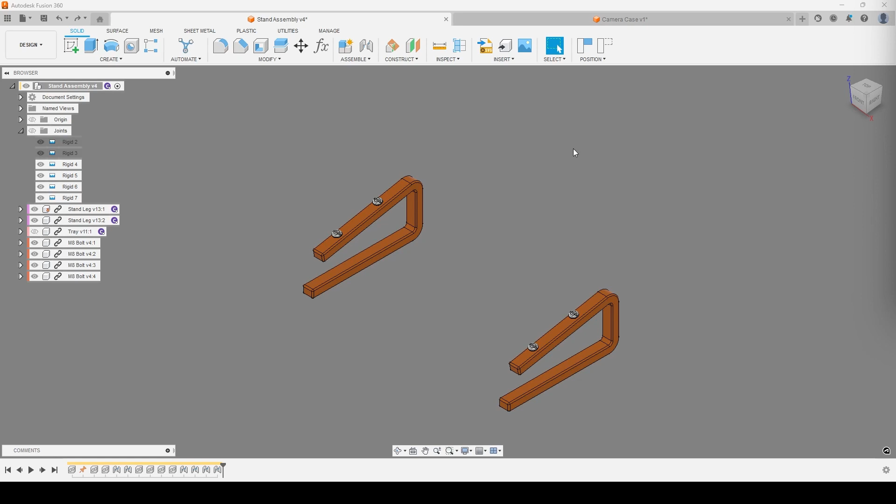Inside of Fusion 360, for this particular model, what we're wanting to do is create a tray that's going to sit on top of these two legs that I've designed inside of an assembly. We want to make sure that when we want to make any adjustments or tweaks to the sizing, we've got some fairly basic parameters that we can adjust, which will make a difference to the overall component itself. So before we get going, I just want to make some measurements inside of this assembly.

We've got the ability to come back into the assembly later on if we ever needed to, but I can just take some quick measurements of these components. So between the bolts, we've got a distance of about 80 millimeters.

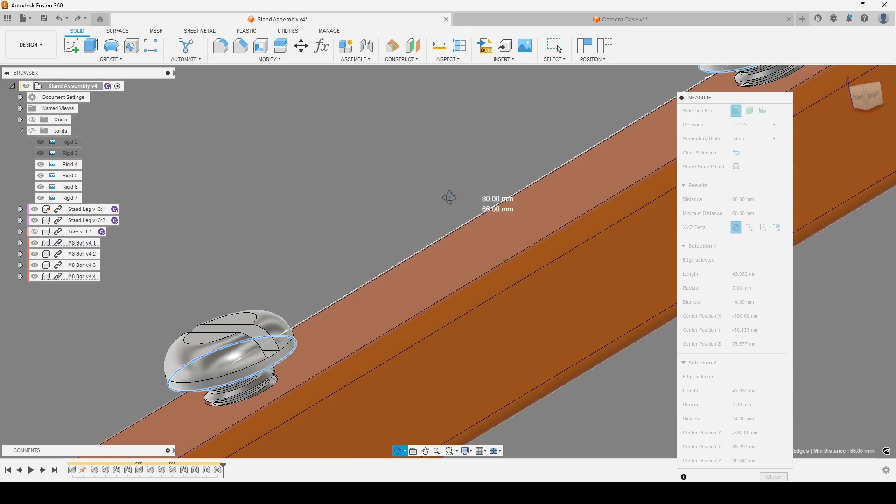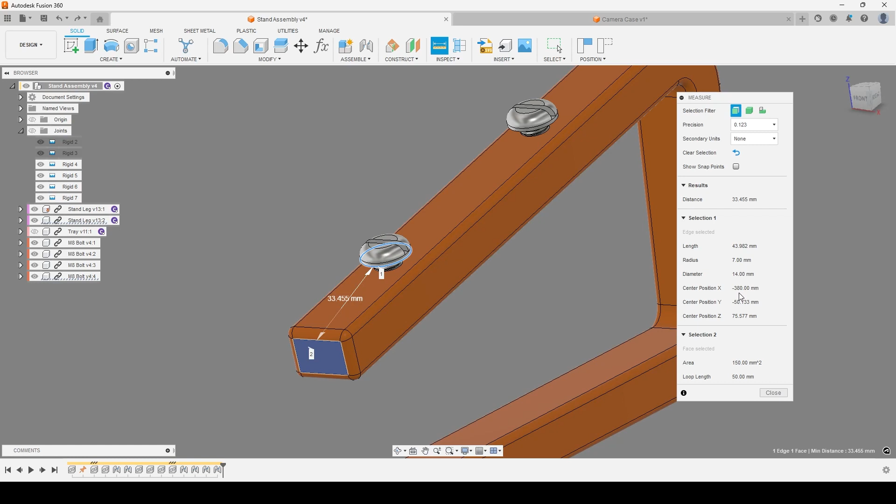And from the first bolt in the front over here to the front of the component itself, we've got a direct distance of 33.45, but we do have a length of, let me see if I can find the right one here. We don't have a proper one on there. Let me just grab it from this face to that corner over there. We've got, if I remember correctly, this should be about 35 millimeters as well. So we've got 35 from the front of the component to the first bolt, and then 80 between those.

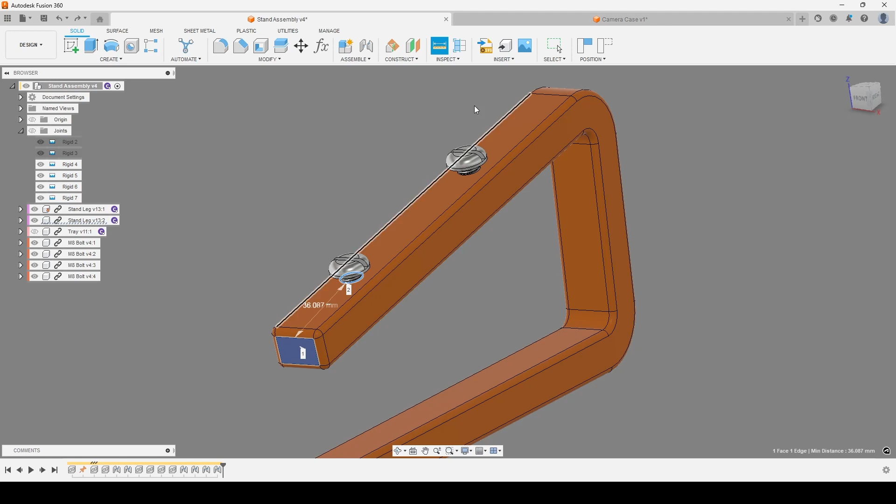So we can go in and create a new component as part of this design. I'm going to go and create this fairly simply. In this new component that I've designed over here, I'm going to go and create a 2D sketch.

I'm going to use the top or ground plane for this and create a center rectangle, which will allow me to choose the center point right at the origin, and then go for a width and a depth for this particular component.

Now, when using parametric modeling inside of Fusion 360, we've got the ability to name our parameters as we start to place these in. So you can see at the moment, the first dimension it's asking me for input on is the width, and that's currently at about 300. I want to give it a value of about 400, but I also at the same time want to give it a name. When we name our parameters, we tell Fusion that these are important parameters and we want to make use of these particular parameters at a later point.

So if I had to go in and say that this is going to be the width, if I could spell width, and say that this is going to be equal to 420.

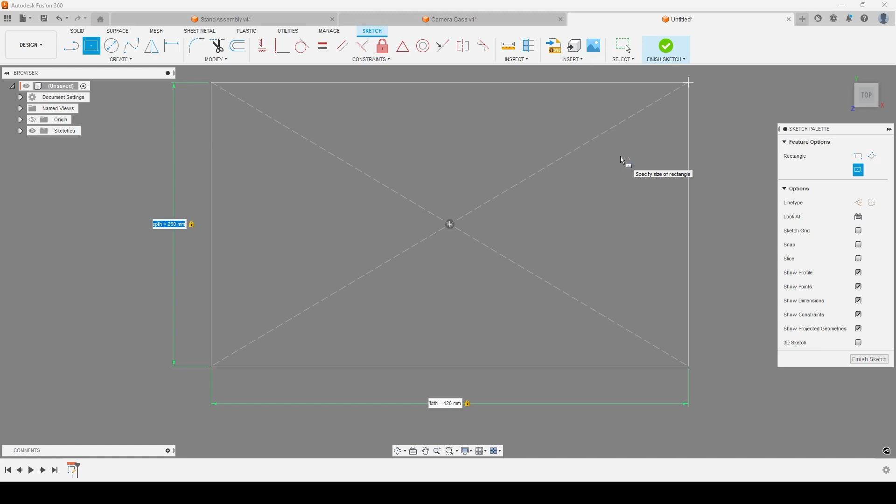I can then hit tab to go and type in the depth that I want. I'm going to go and say this is the depth, and say that this is going to be equal to 250 for now. We can adjust this later on. As soon as I'm happy with those two, if I wanted to change either of them, I can just hit tab and switch between the two of them. But if I'm happy with that, I can hit enter, and it'll then go and create the sketch for me.

As soon as I'm happy with that sketch, I can hit finish sketch, rotate my model around a little bit because I like to be in an isometric view. And then I can go and extrude this by a certain amount.

Now the extrusion, I can also give it a name. I can tell Fusion that I want the thickness, or in this case, maybe I want to say THK. This can be any name that you want within certain reasons. There are some system names that you wouldn't be able to use. I think dia is one of them.

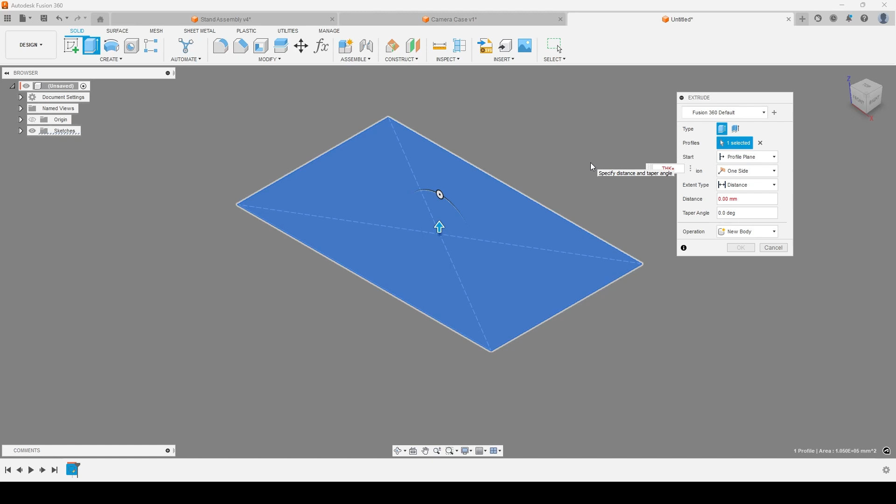So there are a few that you wouldn't be able to use, but we can get around these, and there will need to be a single word. They're not allowed to have any spaces in them, so you can either use camel casing or underscores to separate words. But I'm going to call this THK, and I'm going to say that the thickness is going to be, let's go for 2.5 millimeters. Hit enter, and we've got that set there.

So that's all good and well. This is normal standard procedure really as part of this process, other than giving the names to our parameters. But where this does come in really handy is if we had to go into our modify panel.

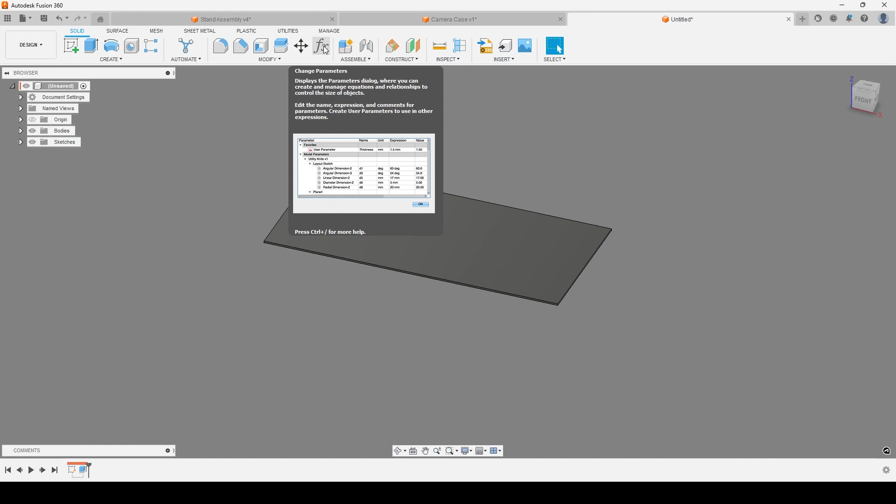Right in the drop down we have change parameters. I've bookmarked mine, or clipped it to the toolbar, so you're hitting the 3 dots over there. I can go and pin this to the toolbar, and so my change parameters button is right at the top in the toolbar itself for easier access.

If I go and grab that, what you'll notice is all of the parameters that I have named, it has added a little star next to them and favorited them for me. So I've got a width, depth, and thickness.

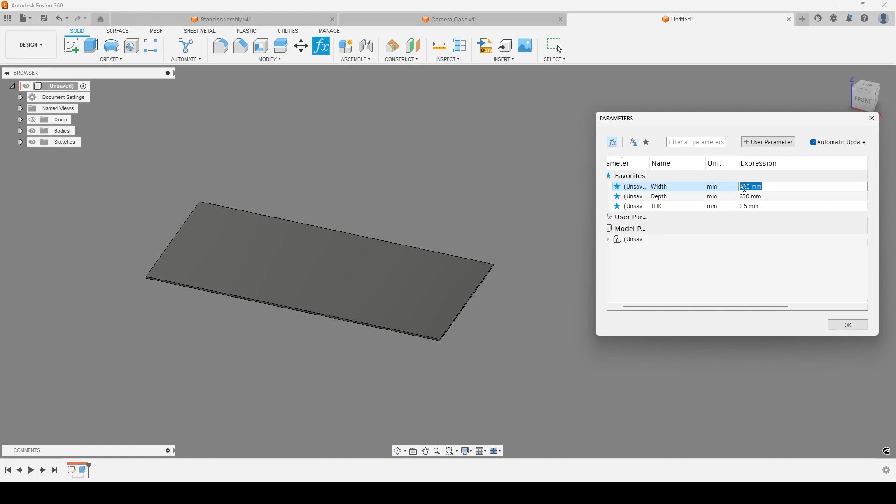What this allows me to do is go and change those values at any point without needing to go into the sketch itself. So if I wanted to, I can go in and change the value of the width. Maybe I want to drop this to 350. I can hit enter and you can see the width of the panel changes. If I want to change the depth, I can go for 220, hit enter, and the depth changes, and same for the thickness.

What Fusion have recently added is the ability to defer automatic updates. So if you were working with some more complicated geometry, in this case we've got a very simple model at the moment, but you can imagine if you were to make some big changes to certain values, they might start to break others without the other values being updated.

We can defer updates temporarily, and I can go in and say, okay, this I want to go back to 400, this I want to go back to 250, and this I want to go back to 2.5. And as soon as I hit apply, it's going to go and apply these changes for me automatically and re-enable automatic updates. So it is just a temporary toggle that's available to me there.

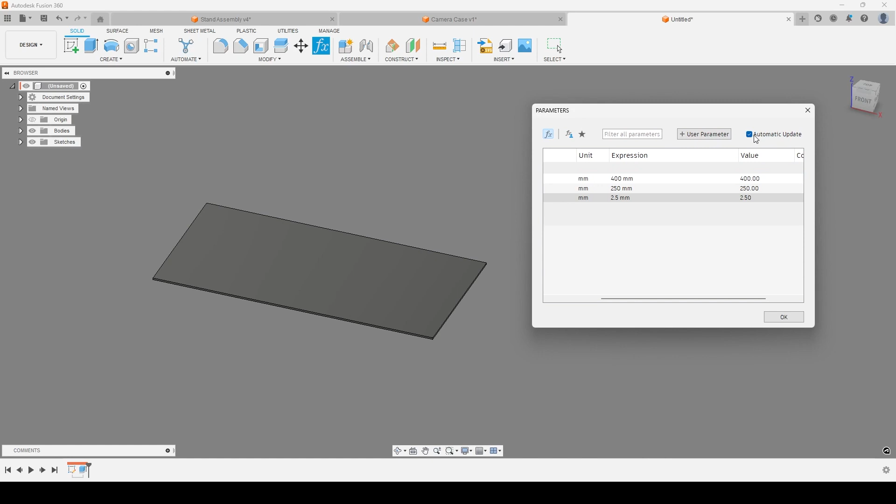So really great functionality we've got while designing inside of this. And you can imagine the usage for this is when you've got a lot of components that might be very similar in shape and size, but you're just running various configurations of your particular component, or you are unsure of what those exact values are going to be initially and want the flexibility of making those adjustments inside of the design.

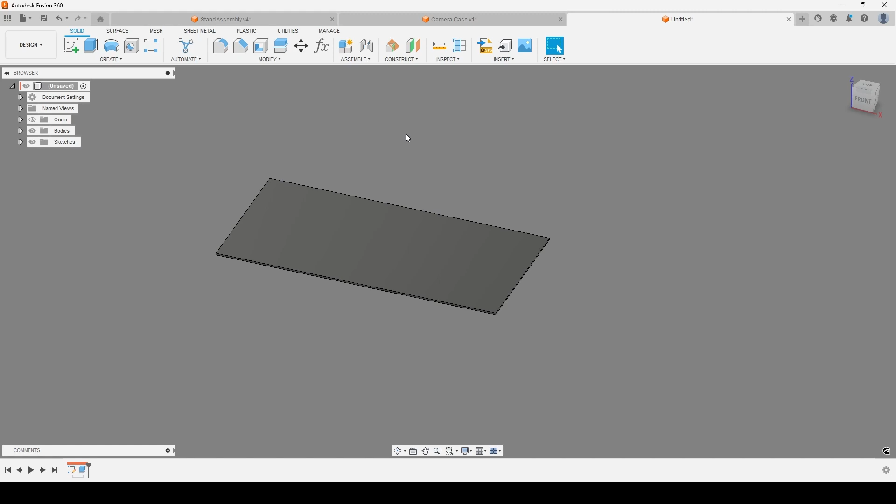What we also got the ability to do inside of this is then use those parameters and start to make some fairly complicated equations as part of this as well. So I'm going to go in and create a new sketch just on the top face over here. And I'm going to place down a single point for the location of a hole because I want to make my panel a little lighter so that it's not going to be too heavy for our stand.

What I'm going to do is I'm going to go in and say that I want the positioning of this hole or this point over here to be 30 millimeters from the front and an equal distance from the side. Now I could go in and type that value in once more, but I can also go in and say I want to go and grab the value of the other dimension. And you can see it's automatically named that D5.

If I had been better about this, I can actually go in and delete those two dimensions, add the dimension in once more, and give this a value. And we can say this is the hole position, or hole pos should be fine, and that's equal to 30. If I then do the same from the side to the point and place it down over there, I can say be the same, hole position 30. You can see how it's referencing that hole position as its value.

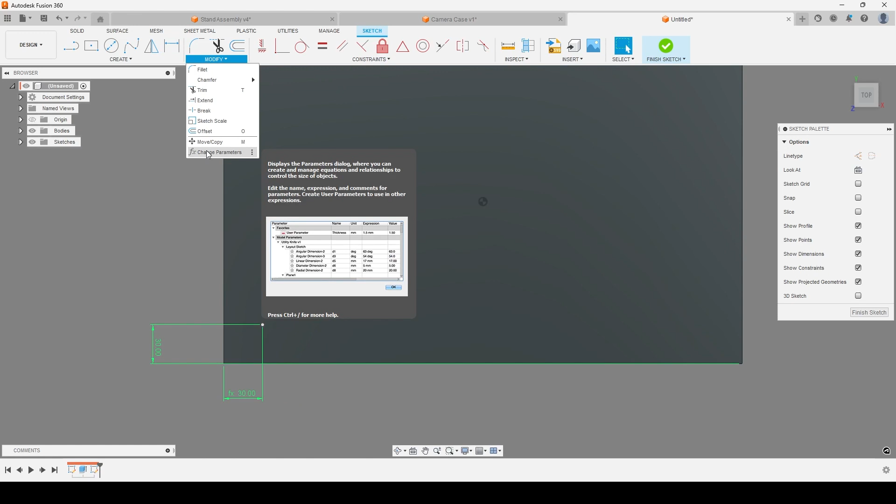Again, if I go into my modify dropdown and change parameters, which is also available inside of the sketch environment, you can see because I've given that a name, it's automatically favorited that for me. And again, I could go and change those values as and where I saw fit. If I hit finish sketch on there now, I'm happy with the positioning of that.

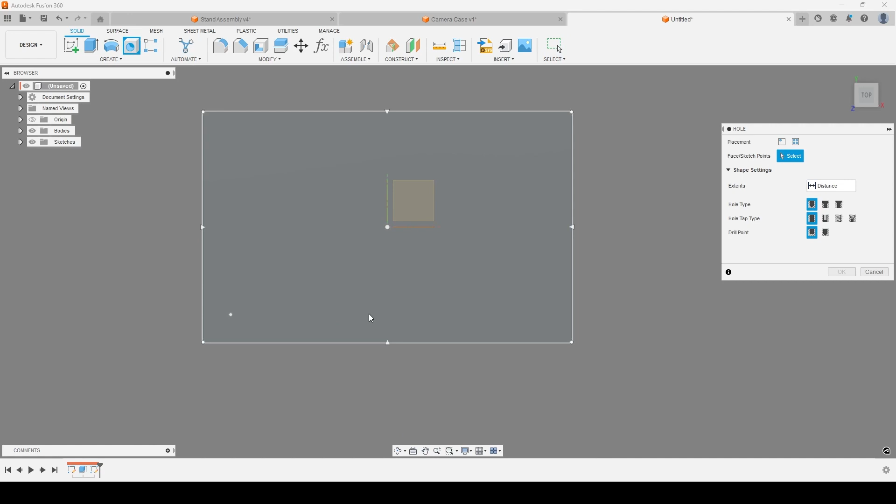I now want to go and place a hole in. So I'm going to use the sketch point to drive the positioning of the hole. So I'm going to use my hole tool, say that I want to use from a sketch, and I'm going to go and grab that hole over there. I can see I've got my hole created there. I've got an 8 mm diameter. Maybe I want to give this a name, so I'm going to say this is hole dia, and that's going to be equal to 8.

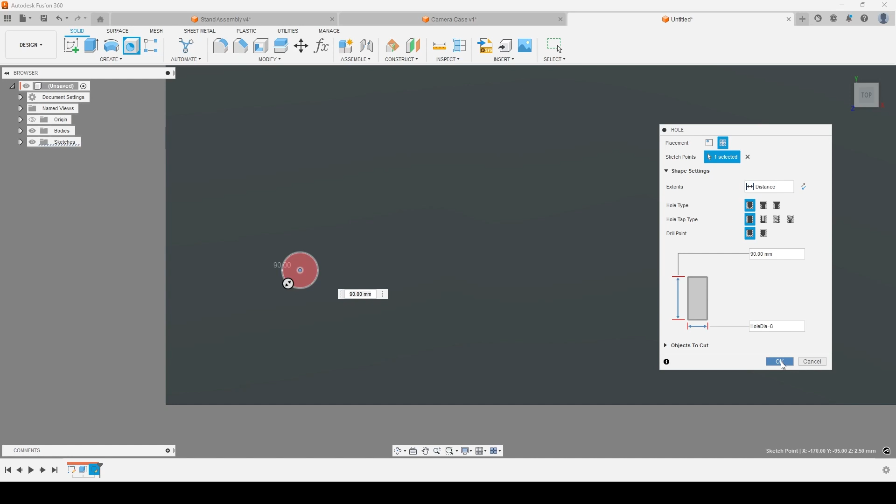So again, naming these dimensions as we put them in will allow us to then make use of them a little later on. So hit OK on there, and my hole diameter has been named, and I've got a single instance of that located there.

Now, perhaps during this process, I want to go and create a pattern of said hole. So I want to go into my create panel, grab a pattern of that and say, you know what, I want to make a pattern of the feature. The feature is going to be the hole that I created, which I'm just going to grab from my timeline down at the bottom. And then I'm going to tell it that the axes that I want to go in are going to be the X and Y axes.

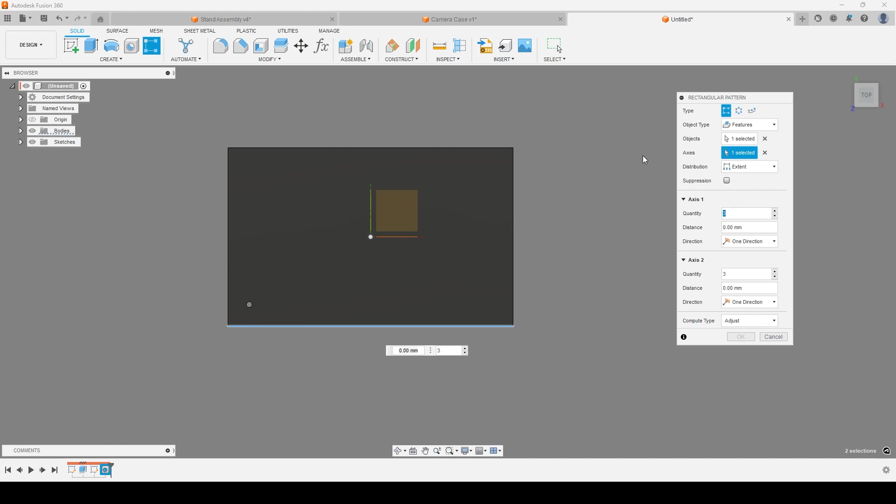I'm going to have a number over here. Maybe I want to say the quantity is going to be, let's just see exactly which one it's using at this point. We've got one object selected. Why am I not seeing these there? Because the distance hasn't been set. Fine. So we've got a rough idea of what that's going to look like over there. And then I can say the quantity is going to be, double check that quickly. I think it's the X first in this particular case. Yep, it is. Cool. So I'm going to say the X QTY is going to be equal to 4.

And the Y QTY, or whichever name makes a bit more sense for you if you want the depth, so you can go the D QTY and W QTY, or whatever kind of makes sense for you. I'm going to go and set that to 3 in this case. Then because we are using an extent rather than a spacing, we want to make sure that the distance of the overall pattern is going to start and end at more or less the same position in relation to the edges of our component.

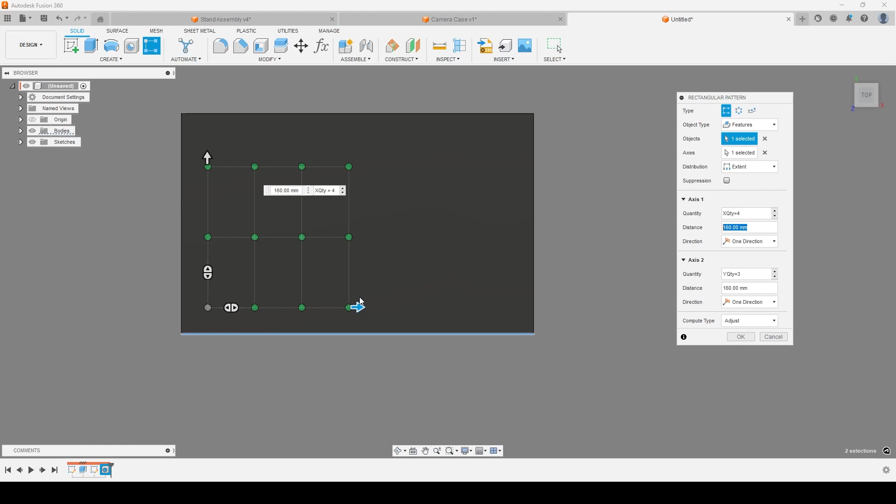And to do that, we can actually start to make use of the dimensions that we've already added into Fusion. So we already know that the distance from left to right is going to be the width of the component. So we're going to say that the distance is going to be equal to the width. But we don't obviously want it to be the overall width because that's going to extend over. So we want to subtract from the width. So we can put a minus sign in there. We want to minus twice the size of the hole offset.

So I can go in width and in brackets, I'm going to say hole pos, there we go, times, using an asterisk, 2, and close the brackets. So we can use some fairly complex equations as part of this process, which is really going to allow us to hone in the positioning of our parts. And you can see now it's going to have the same distance from the one side to the other because the distance from the left is going to be the hole position. Then we've got the width minus twice the hole position.

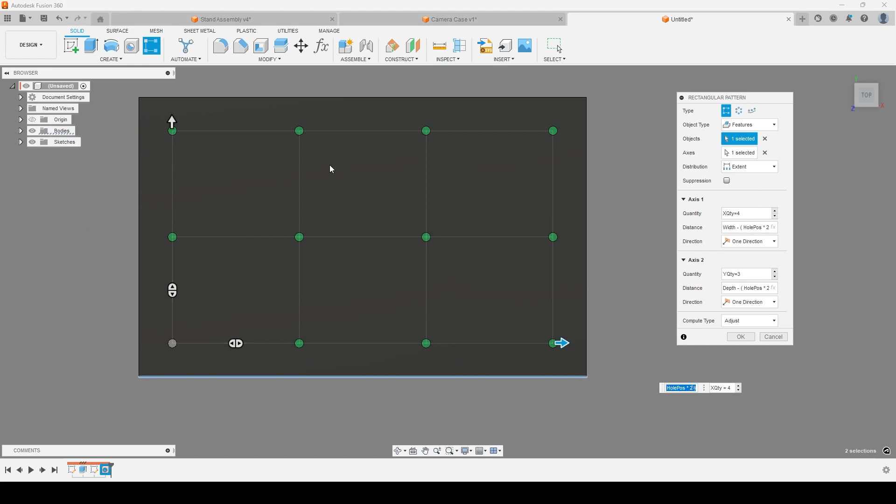And we can essentially do the same process for the other direction. So I'm just going to copy this to make it that much easier. And for distance 2, I'm going to say width value minus hole position, but I'm actually going to change this to the depth instead. And it's going to pick up the depth. And we can see that the positioning is exactly how we want it. So I'll hit OK on there now and finish that off. At the moment, it hasn't quite filled it in exactly the way we want it, but for now, that looks fairly okay.

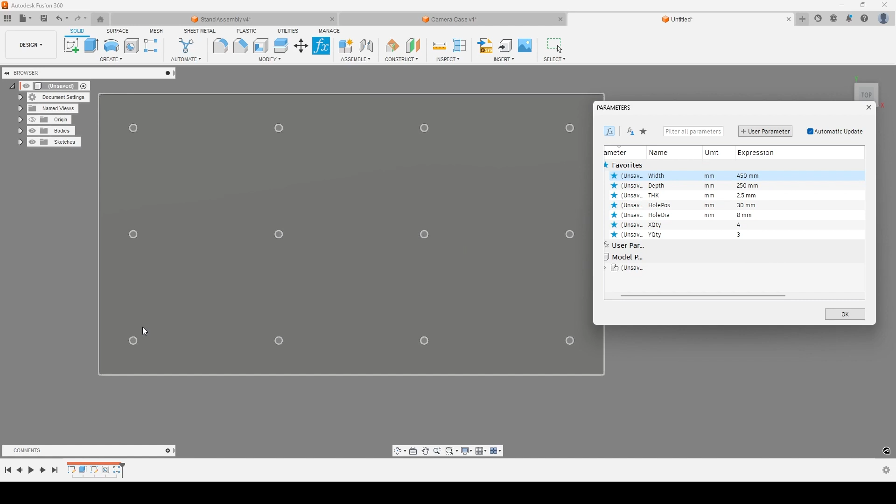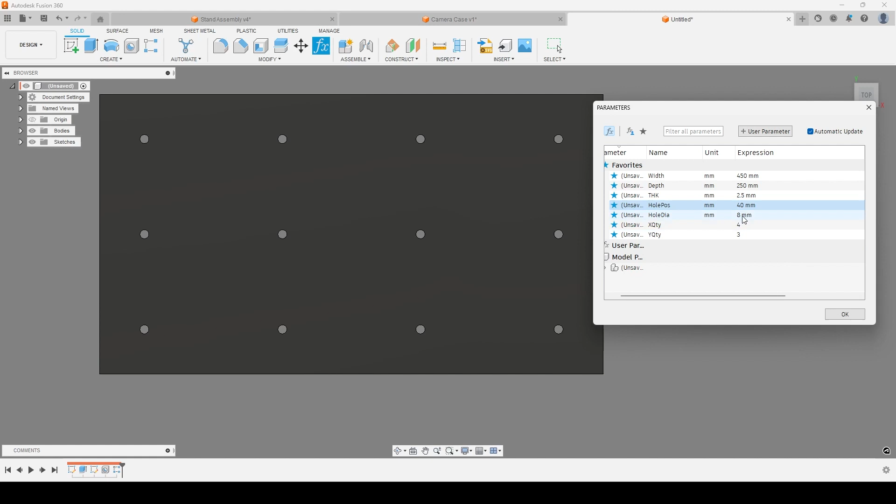I can go into my change parameters once more though and start to fine tune that as and where I need to. So I know my width is 400. If I bump this up to 450, you can see the positioning of the holes in relation to the edges is still true because we set that value for ourselves. If I adjust that hole position value to 40, maybe I want slightly larger holes and don't want them as close to the edge, that will then drive the hole positioning from the outside of the component in all directions because we've used that as part of the equation.

We've got the ability at this point as well to change the hole diameter to 10 millimeters or more or less. And we've got the ability to change the number of holes in the X direction and the Y direction. Again, we can rename those if we wanted to. So we've got 4 along the width. So I can maybe say, actually, I want this W quantity and this to be D quantity. I can go and change that now.

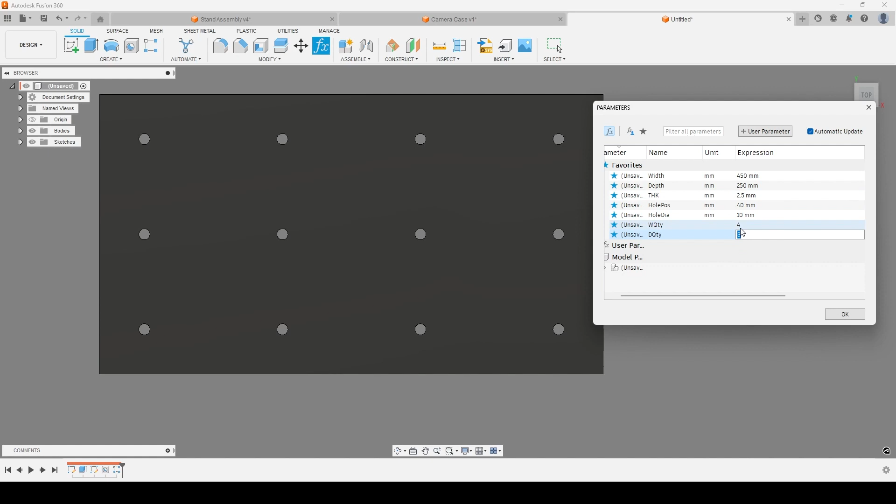So if I wanted to double that, I can go for 6 holes in the depth and 4 holes in the width, and maybe bump that up as well to 8 and 6. And you can see how just by going in and changing a few values at this point, we've got the ability to really hone in again on the design of our component. If we understand the concept of it and we've got a design intent, we've got the ability of enforcing that then with the parameters that we come in and place.

Now, as you see, we've got the ability to reference others. So if we wanted a certain width to depth ratio, we could adjust that as well. So we could say that the width is always going to drive the depth value as well. So the depth is always going to be the width times 0.8, or maybe let's go 0.6. So whatever value we give to the width, it's going to then adjust the depth as well. So if I had to change the width value to 600, the depth is also going to be changing at that point.

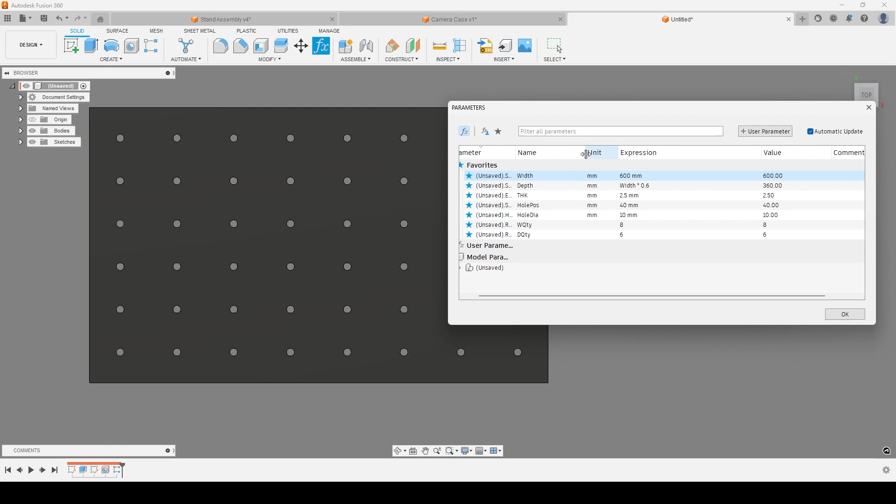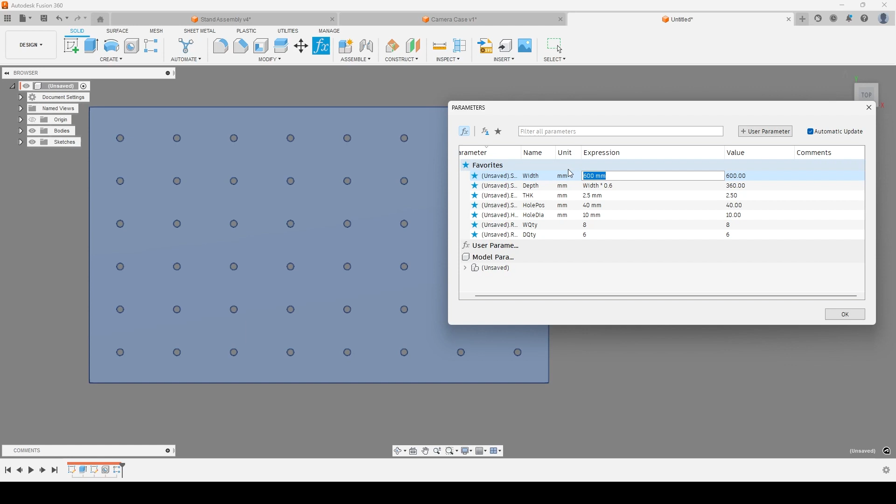So if I expand this out a bit, you can see how this works. We've got our parameter value, we've got the name of the parameter itself, we've got the unit of measurement that it's using, and then we've got an expression column. And once it's made sense of the expression that we've created, it gives us an overall value at the end. So as I'm adjusting the one value, if I'm referencing any other parameter, say for example the width that is being referenced by depth, it will always change based on that as well.

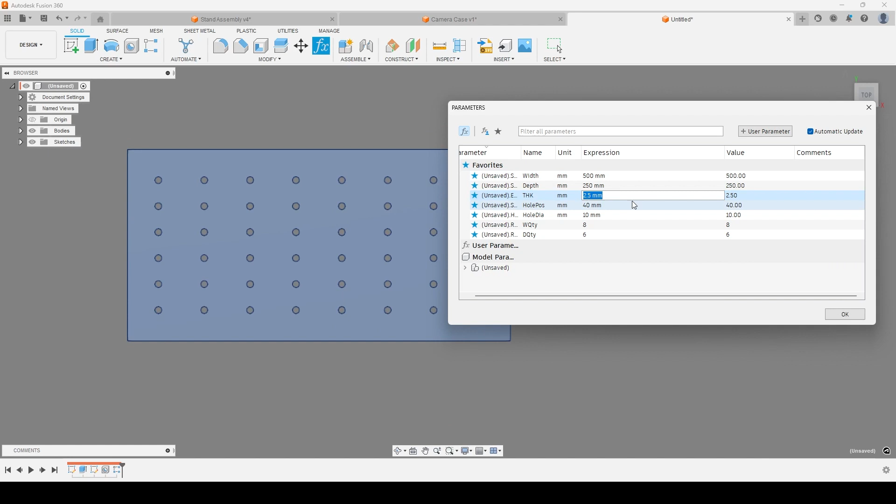So it's a really great way of making sure that, again, we're keeping that design intent true as we go through. If we wanted a different value for thickness, we can come in and set that here. Hole position, hole diameter, number of holes in the width and depth. Rather than having to go in and try and readjust every single individual parameter every single time, we've got the ability to very quickly go through and adjust these here.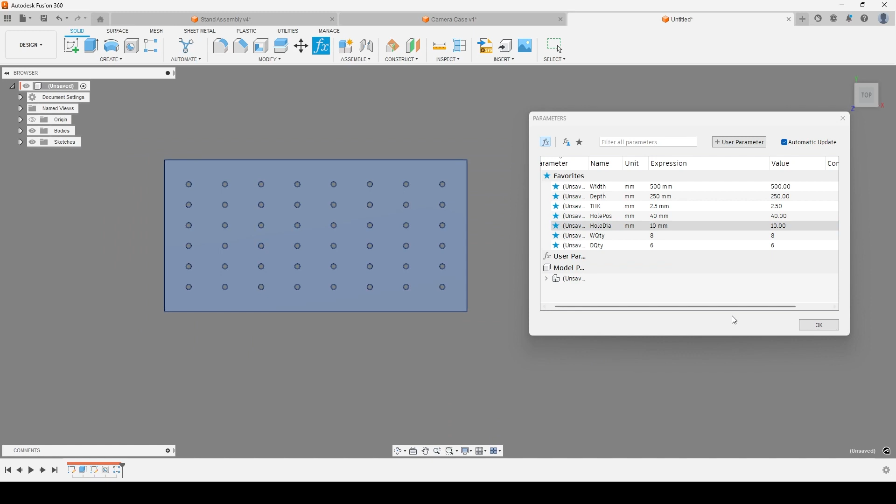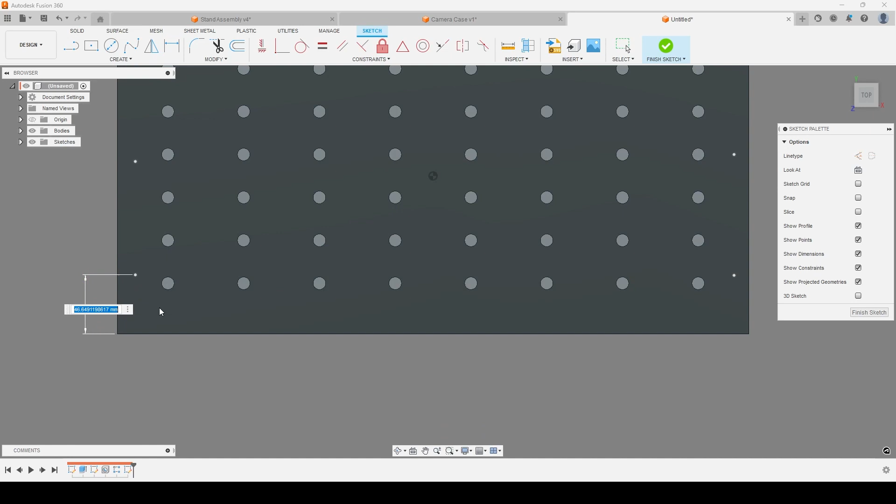Then lastly, we just want to go in and add those 4 holes. Again, going to use a sketch for this one, just for the positioning of our components. And if I remember those values, I can always double check them, but I've got a point there, there, another one there, and there. And I'm going to add a dimension of, I think it was 35 millimeters from the front, and 80 mil from the first point to the second point. And then I want the holes on the opposite side to be horizontally in line with those two.

So again, using our parameters, I can go in and change this value to 40, and it's going to drive the other values as well. If I change the 80 mil to 75, you can see the hole position for the 2 top ones changes as well. Fairly sure it was 80, and let's just make sure these are all vertically in line with each other as well. So I'm going to use my constraints to make sure they stay in the correct positioning.

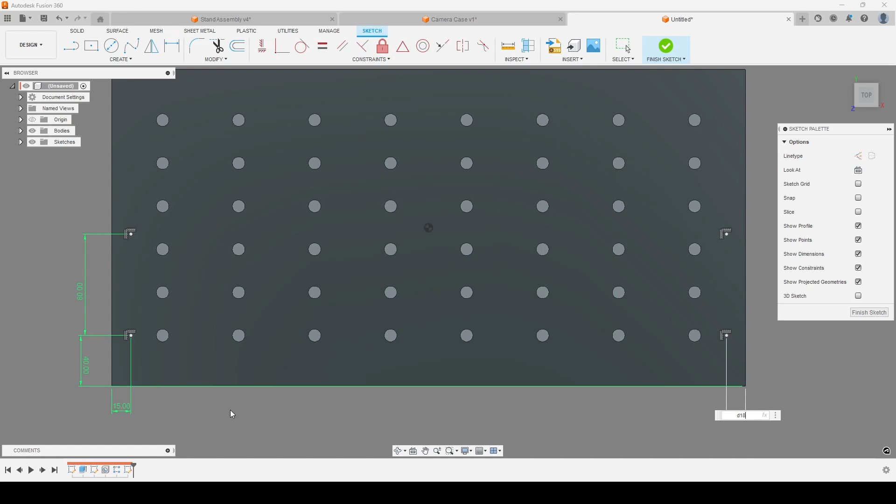And then the last one is just a dimension from the side, which I didn't measure. I'm not going to name this one for now. I'm going to say this is going to be 15 millimeters just as a guide. And I want to make sure that these are exactly the same distance as that from the side. Finish sketch on this quickly. Create the holes that might be required as part of this process. So 1, 2, 3, and 4. And I want a diameter of 8 mil on these holes.

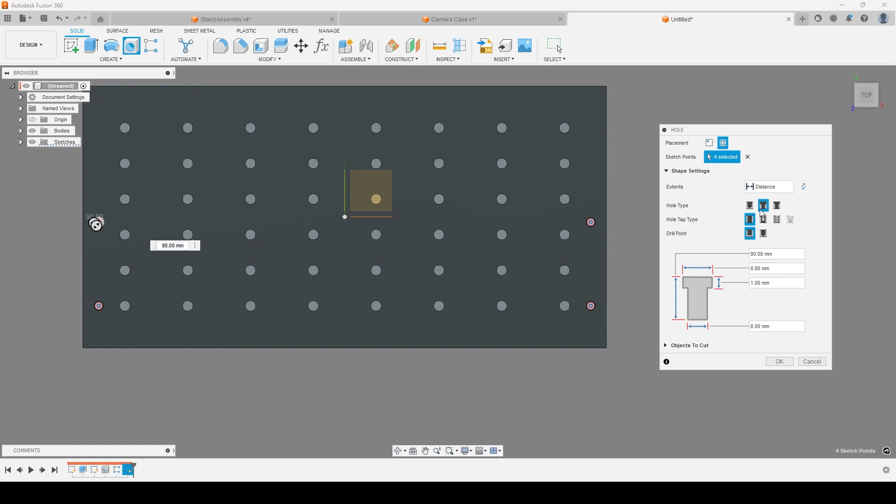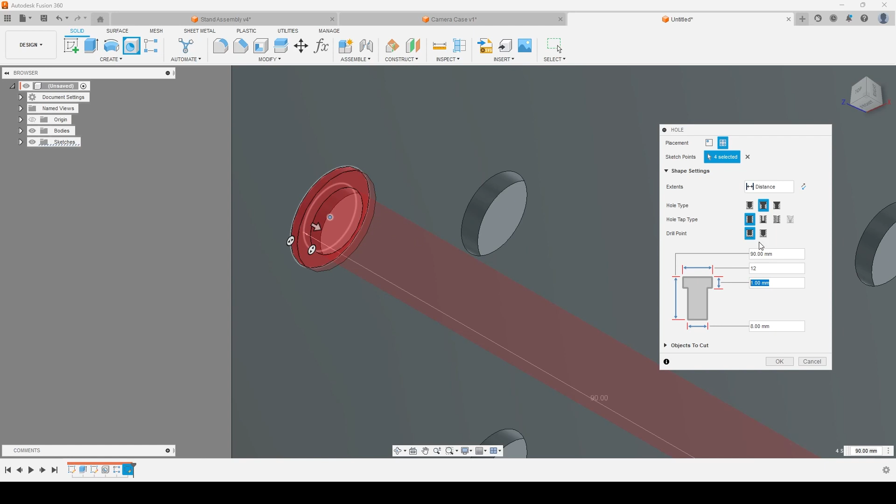And potentially I want to make them a little bit more complex. So I'm going to go and grab a counterbore for these. Let's go a little closer to the side over here. Maybe adjust the counterbore diameter. Bump this up to maybe a 12. The depth at 1 mil should be okay, and the other value should be okay as well. Rather than a through all or a distance, let's go and say we want a 'to' value, so it's always going to go to the back of our component as part of this process.

Hit OK on that, and we've now got the counterbore holes created in a similar manner to how we had the other holes created. Once you're happy with this, we can save this file, and we're going to call this the laptop tray.

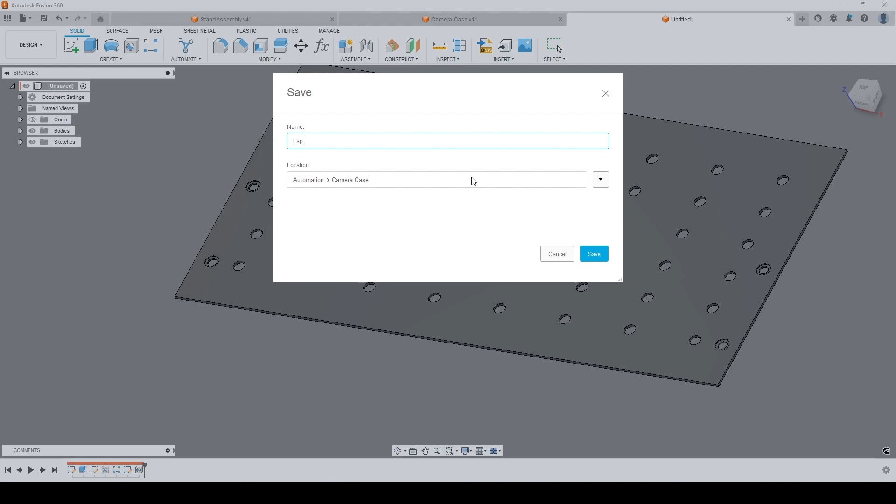Don't want to save it to camera case because that's the wrong location. So let's go into our Fusion overview and save it into that location. Great. So now that we've got our laptop tray created, we can go into our assembly and we can drop this item straight into our assembly.

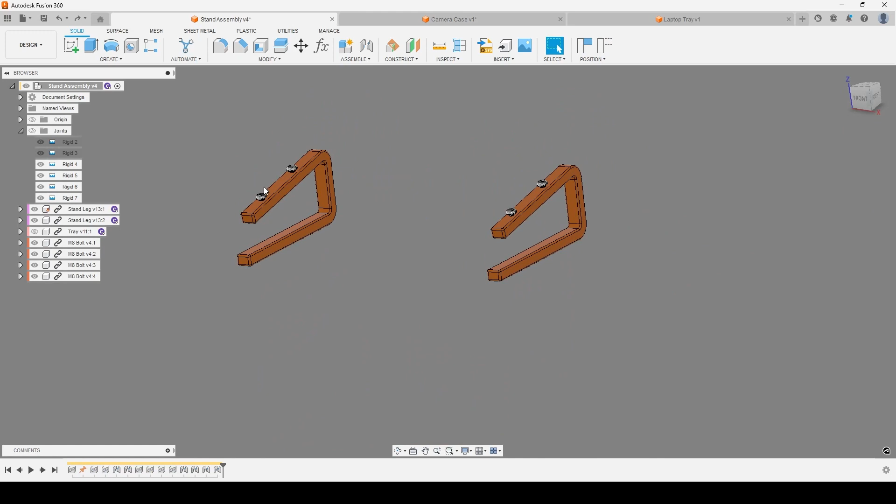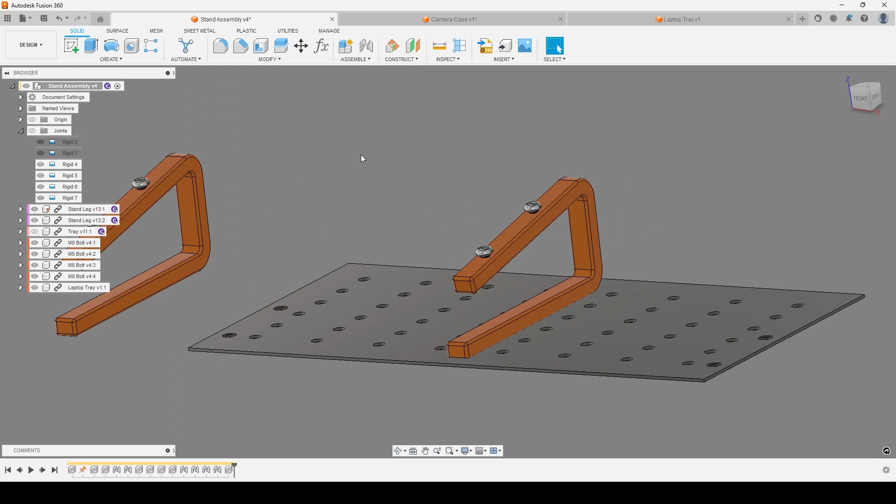So I'm going to go into my data panel on the side here, go into the location that I'm wanting, which would be the Fusion overview, and we can see we've got our laptop tray available to us here. I'm just going to drag and drop it into my assembly. And okay that, I'm not going to worry about the positioning just yet. And I'll close my data panel just so I've got the visibility once more for this.

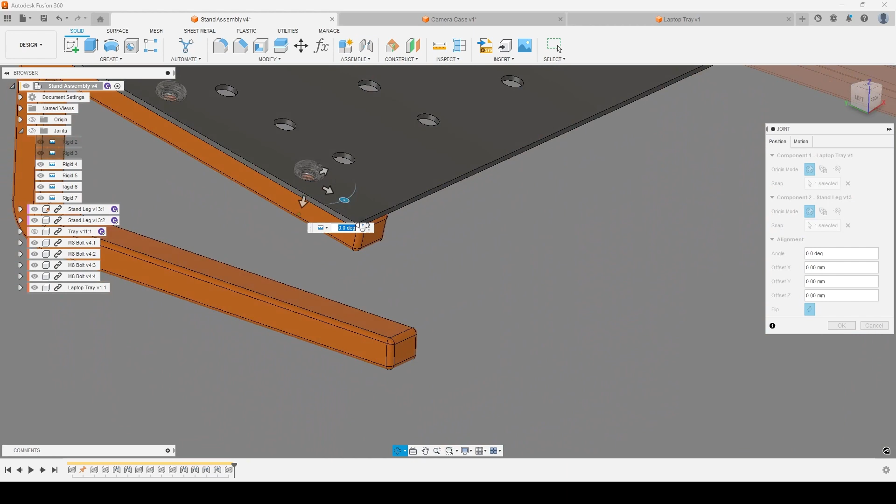From here, we want to go and add some joints in very quickly just to make sure that our components are aligned correctly. So I'm going to go and grab the hole over here and make sure that it's aligned to the hole on this particular component. And as soon as that's there, I can establish more or less if that is in the correct positioning, and my calculations seem to be okay so far. So we're all good on that. I can hit OK on that and place that in.

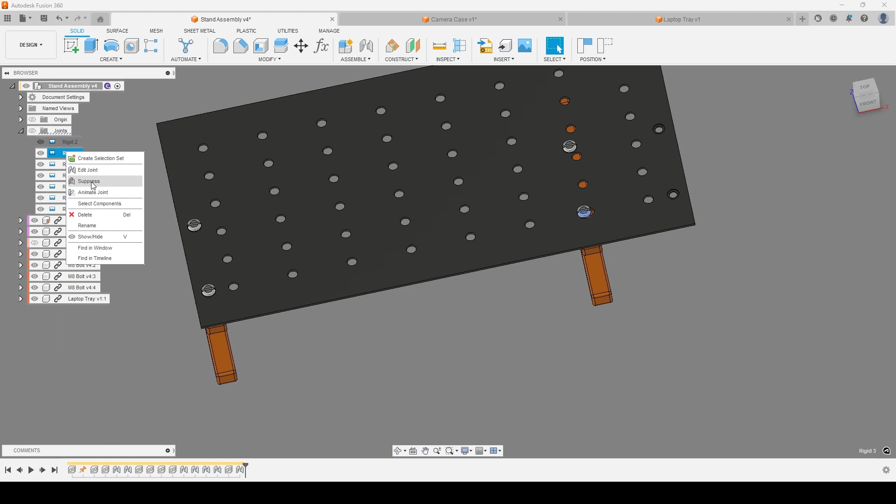Now we've got these other components over here which can't move around, which is interesting. I'm fairly sure they should be moving around. I haven't suppressed these. Let's suppress these very quickly, which should mean that they're not going to be causing anything. There we go. So we've got the positioning fine in relation to the tray and the stand. I want to go and do the same on the opposite side. So again, the bottom of that hole to the top of this hole over here.

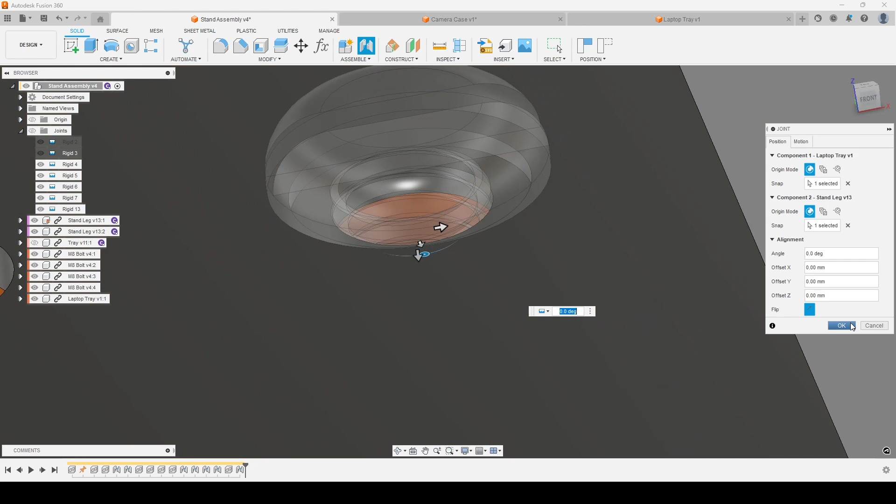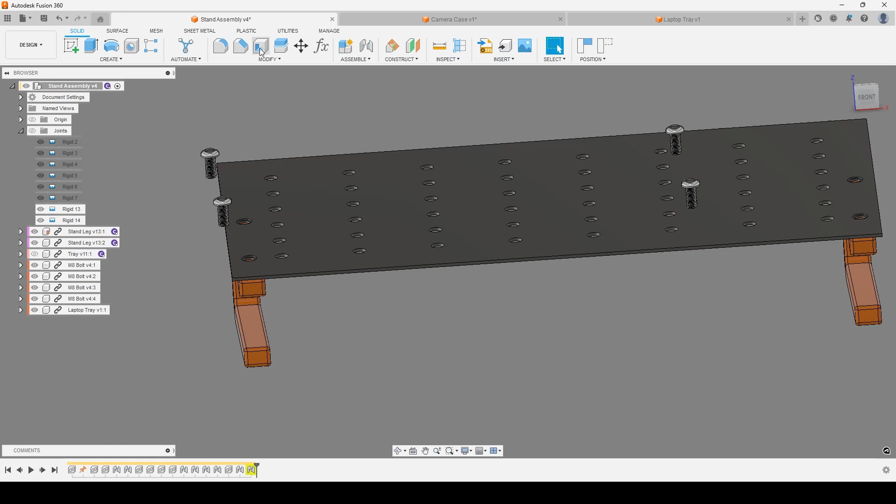And okay that. And now we've got our two items. Yep, the legs are attached. The bolts are just not attached at the moment. They can float around as and where they are. The reasoning for that is because they're associated to something else. So let me just go and remove and suppress those, so they should be able to move freely wherever they want. And very quickly, just go in and add some joints between the bolts and the holes that we've created over here.

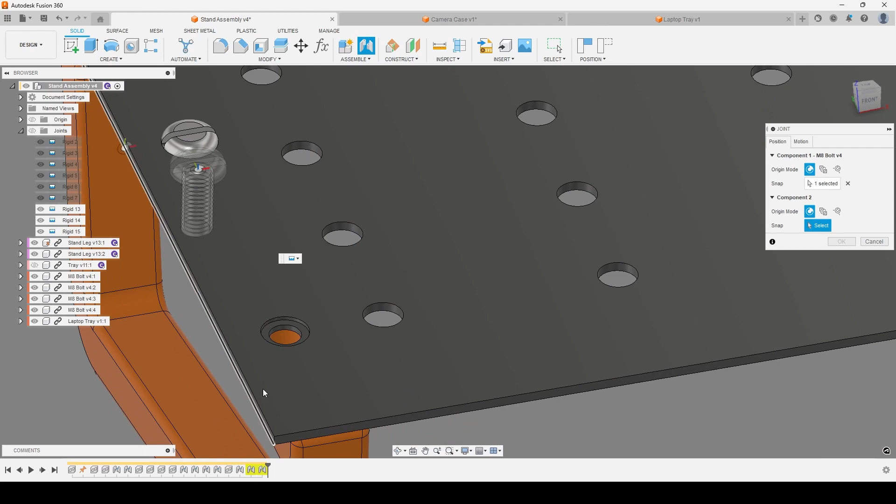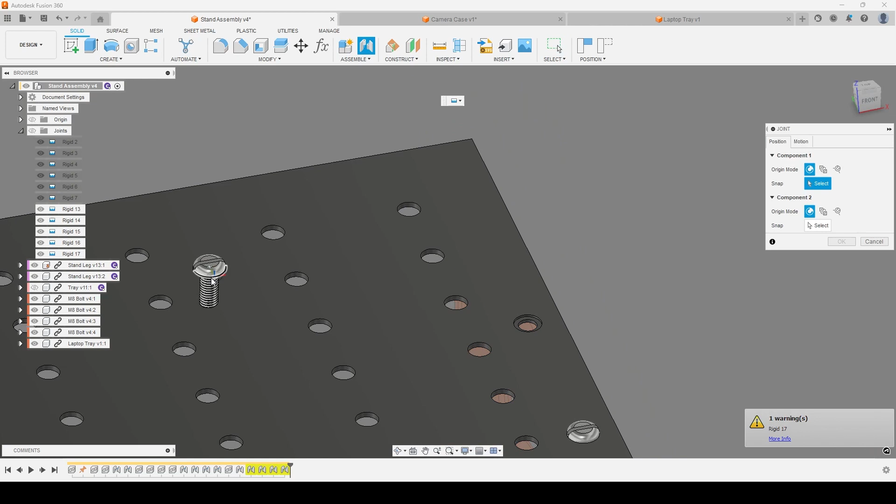Might need to adjust those counterbores. They seem a little bit too small for the bolts that I've created. So that could be something I go and adjust. We've got the parameters for all of those now, although I don't think I did add it in for the bolts, but we'll ignore that for now. And last one very quickly, somewhere over here, we've got our hole and place it against there. So now we've got a fully assembled component minus the bolt and the nut on the other end, but we'll ignore that for now.

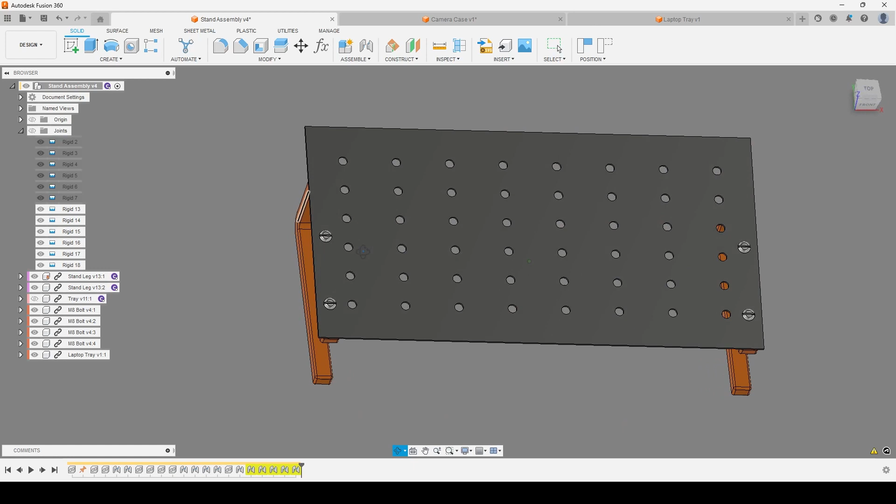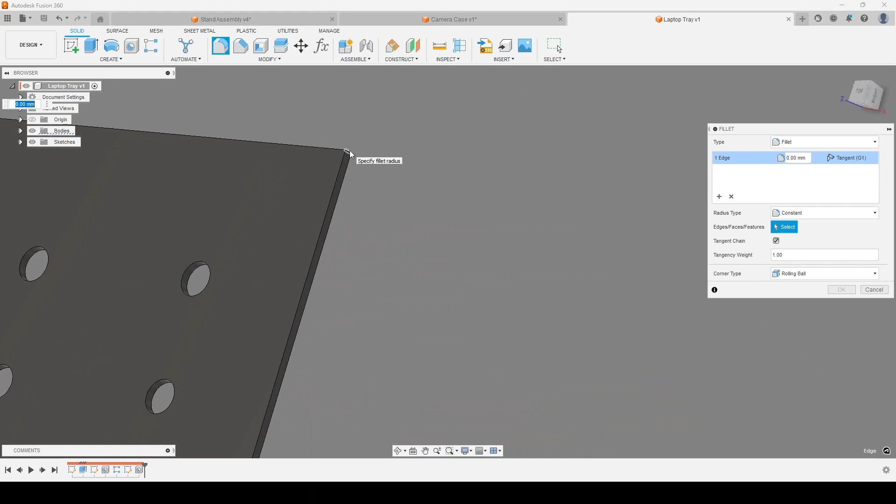Now we might notice in this one that the tray is potentially a little bit too long, so we might want to make that a little shorter. Might also see that perhaps it needs a bit of a rounded edge over there, so we might want to go in and make the adjustment to that. So I'll go into the laptop tray very quickly once more, go and add some fillets to the edges, go and grab all 4 edges. Last one. And adjust the sizing of it.

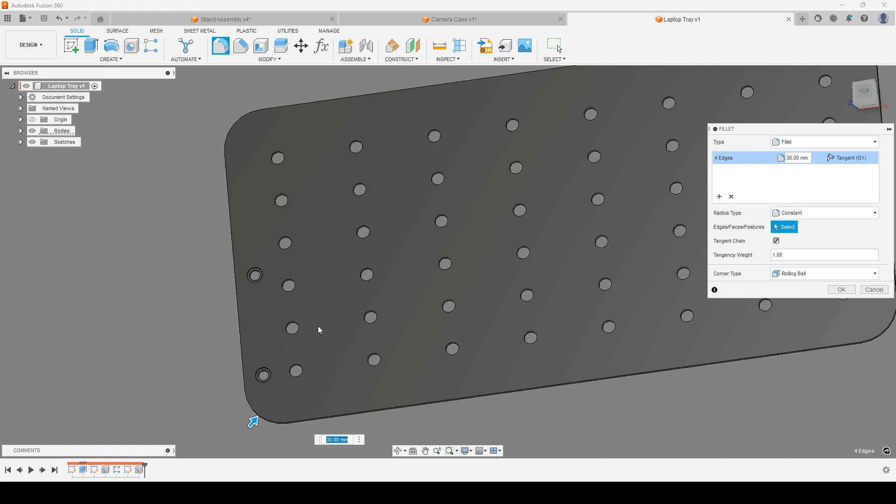We had the 30mm on that item over there, so maybe about a 30mm should be okay on here as well, although we upped it to 40. But I'll go for a 30mm fillet on there and hit OK. Again, if we wanted to, we could name it at that point, but we can also go into our parameters. Into the list over here, we've got the model parameters that are available to us.

And it'll list every single feature that exists inside of our component, including the hole 2 over here. And you can see the hole 2, we've got a hole depth, hole diameter, and then we've got our counterbore depth and counterbore diameter. I can go and call this CB dia as well if I wanted, and favorite it at the same time. And that'll now appear at the top of my list.

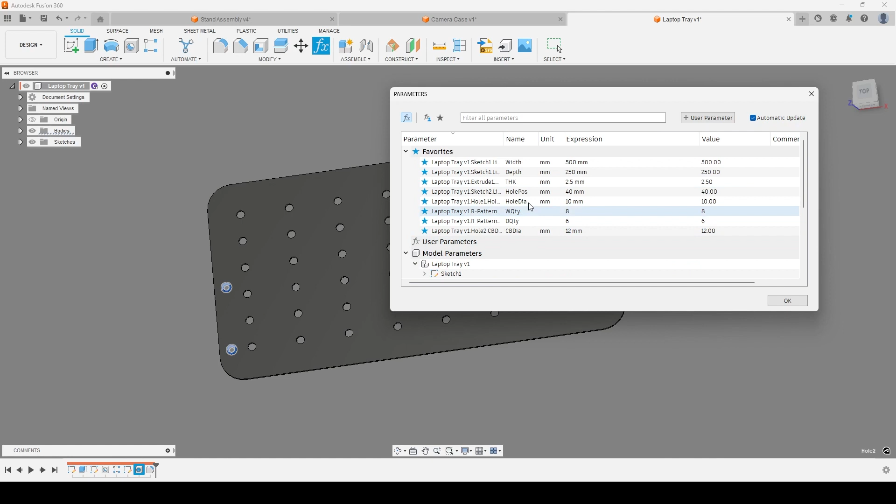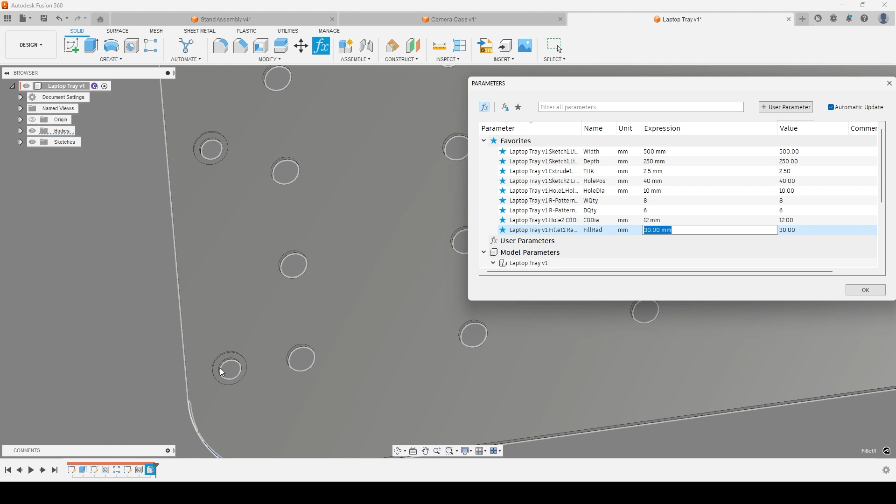And I've got the ability to go and grab the parameters inside of the fillet, which will be the radius, maybe fillet rad, and favorite it as well. It'll then appear at the top of my list. So now I've got all of the parameters that I ever need in there. So we've got that item, the diameter of the counterbore that might be a little bit too small, and we can adjust that in the model itself in a few seconds. So if I hit OK on this now, we've got the fillet added in.

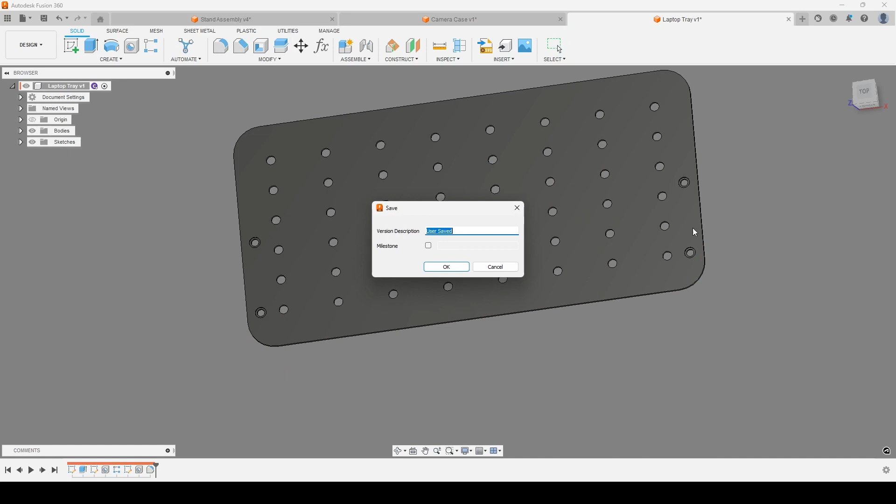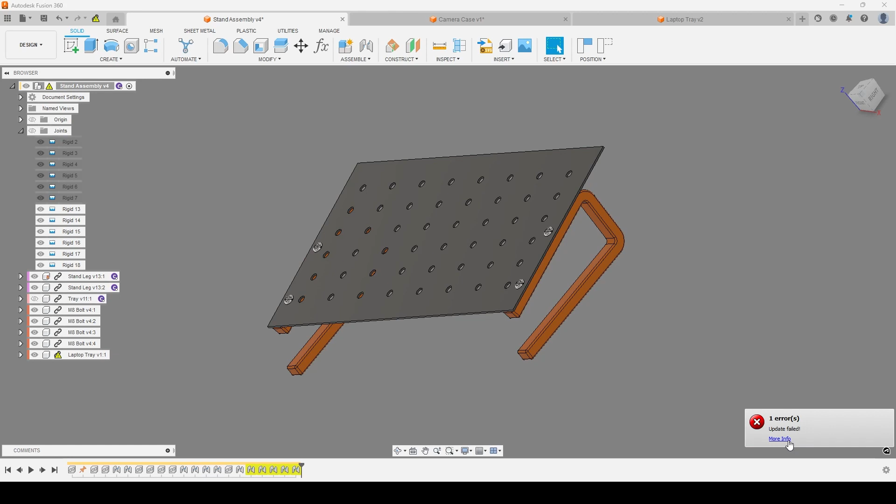Now that won't automatically update inside of our assembly, but as soon as we save this file, if I just hit a Control S and save the file and go back into my assembly, what you'll notice is it's going to be prompting me that there is an out-of-date model inside of my assembly and ask me if I want to update it. I'll say, sure, I want to update it. And it's going to go and one more time update that file. Let's see. Interesting. Save it and update it.

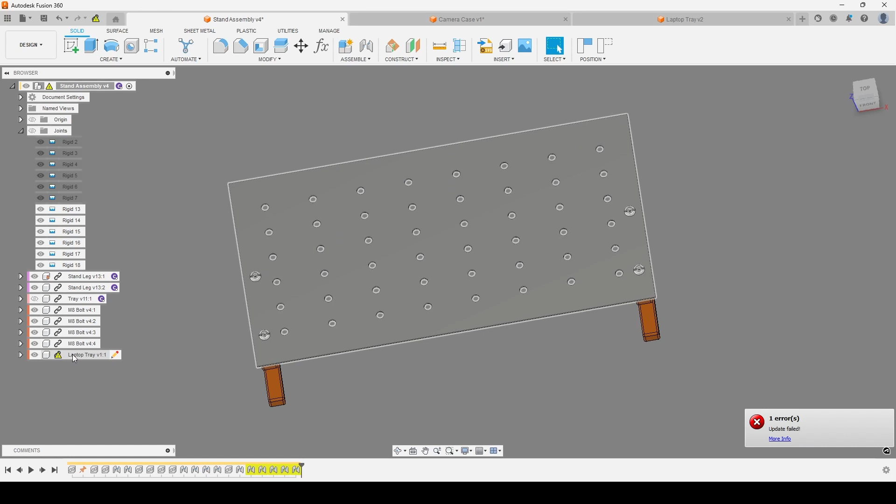Interesting. Let's go and get latest directly from there. Odd. It's gone and gone. I've managed to get the latest version straight from the component itself. This might be something that they've changed recently that I'm not aware of. But we can see that we've now got the ability to go and grab that.

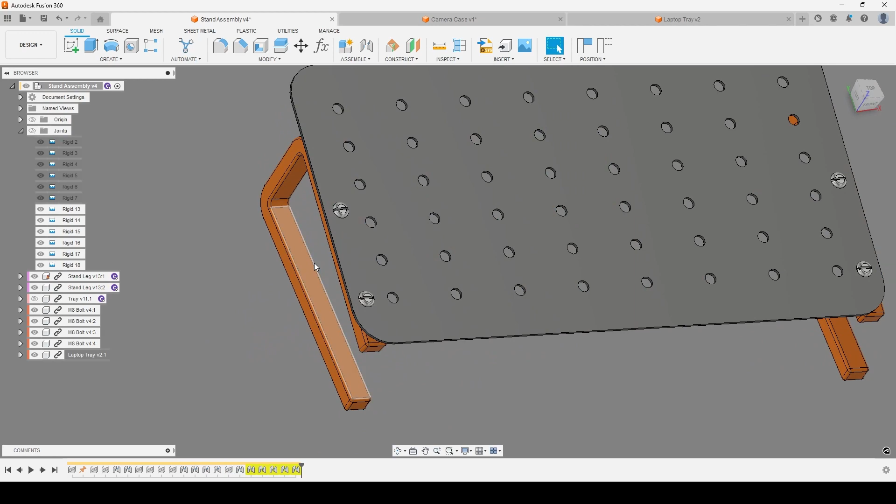We've still got, as I said, our bolt that's got a slightly larger diameter than the counter bore itself. And so the way we can go and fix that is actually by adjusting it. If we did want to, we've got the ability to adjust those exact same parameters inside of the assembly. So this is why it's really important and a really great functionality to be able to push these in the components themselves, is we can actually do an in-place edit of our individual components inside of an assembly.

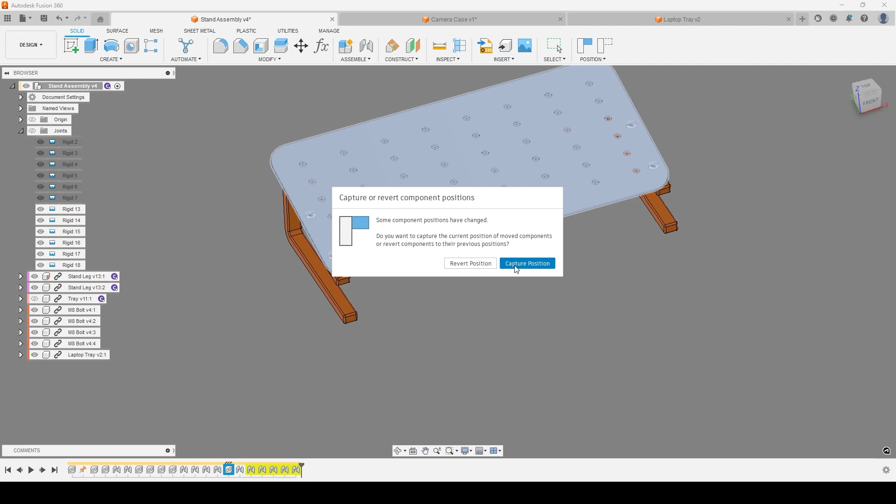So as I hover over the individual component, I've got the little pencil mark available to me, and I can do an edit in place. If I do the edit in place, it's going to ask me to capture the current position, which is fine. I'm happy with the current positioning of everything. And you can see it's grayed out everything except for the component that I'm trying to adjust. So inside of this, I've got the ability to go and grab my parameters, and I get a grayed out version of the rest of the components that are inside of my assembly.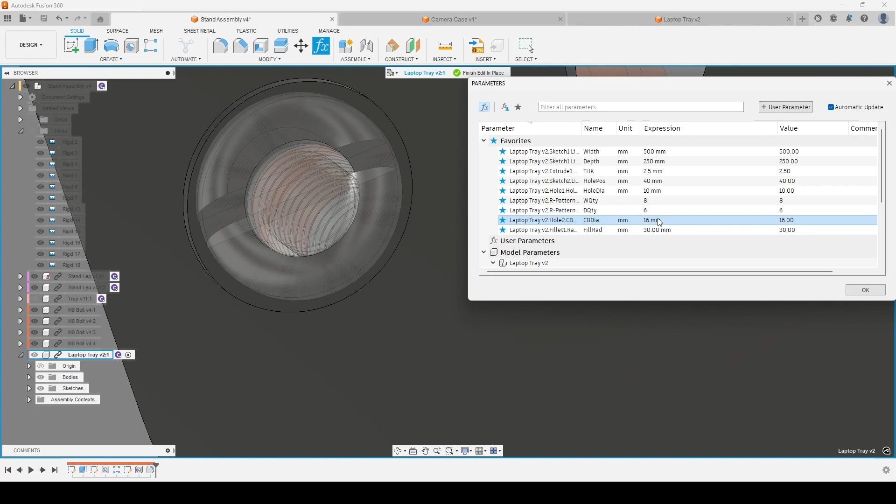So I can eyeball and see exactly the size that I'm requiring for this. I could have measured that. I can still measure that if I want to inside here. And I can see that the radius is a 7 mil. So therefore I'm wanting a diameter of 14 or more. So I can go into my parameters, change that to perhaps a 15 or even a 16 might be a better size. And I know that I'm designing to the correct size for the assembly itself during this process.

The other issue we did have is the back of our component, or the back of the tray, goes a bit too far for my liking, beyond the stand itself. Although it probably would be able to handle that, I probably want to just make sure it is a little shorter. So you can go and grab the depth value and say, let's go for 220 instead.

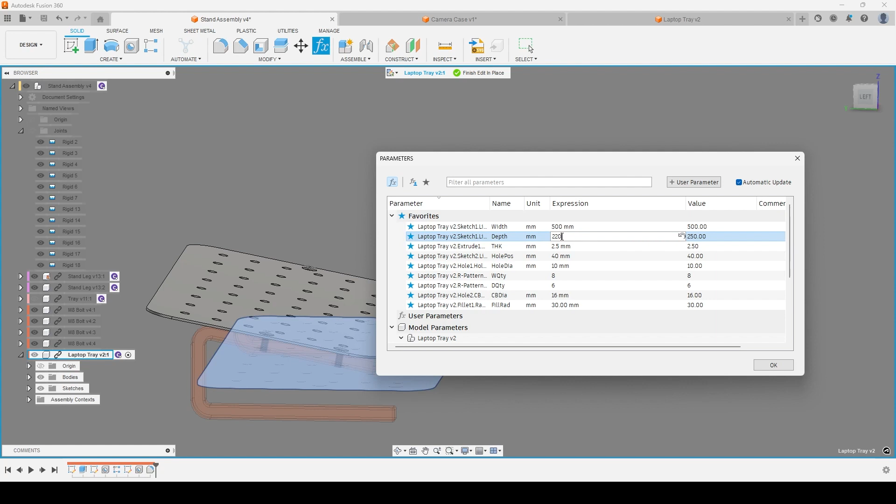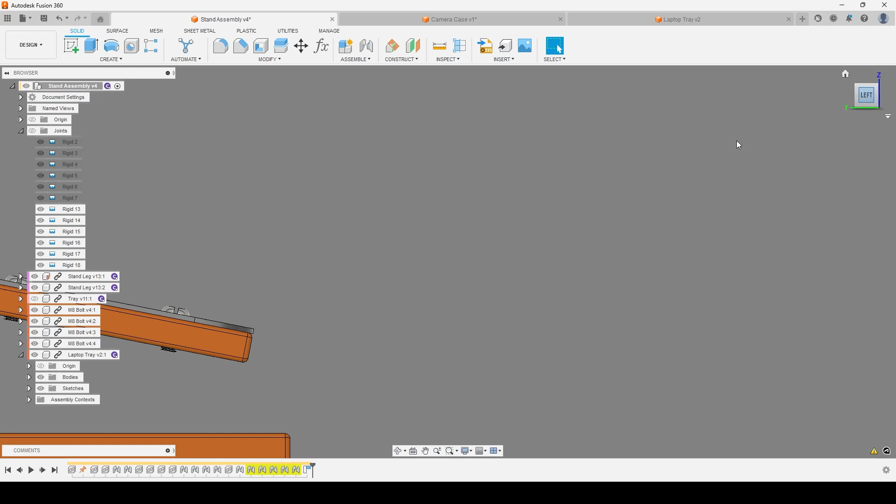And by adjusting that value, currently it's changed the positioning in the view, and that's just because of the location of the origin point. But as soon as I hit OK on here now and go and finish my edit in place, it'll automatically update that in line with the joints that we've applied. And we can see that the positioning is just a little bit better, and the sizing of that is so much better as well.

Now, last adjustment will probably be this tray is way too small, way too thin. We probably want to go and adjust the thickness of the tray itself. So I can go in again, edit in place, change the parameters, change the thickness to, let's go for a 3 mil or 3.5 potentially. And maybe the tray itself is a little too wide at 500 mil. It seems a bit excessive. Maybe we can drop that down to 400.

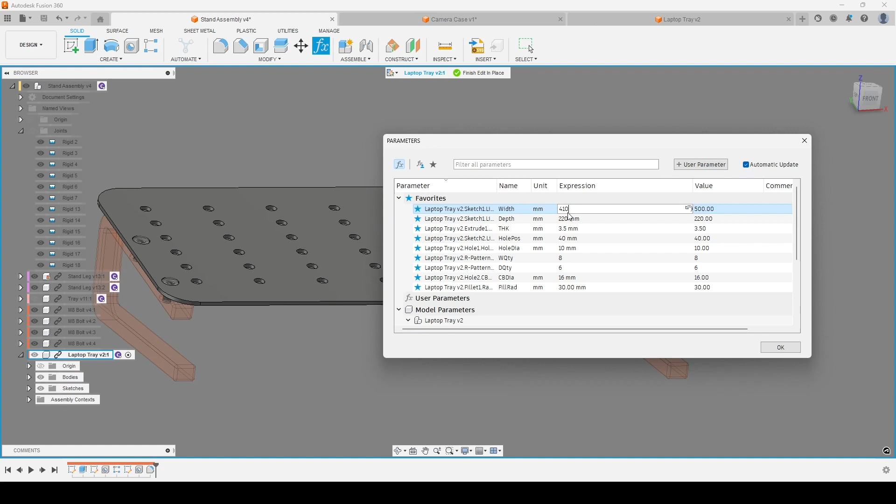Again, it's not going to update the assembly because we're modeling in place, but as soon as I finish the in-place modeling, it's automatically going to adjust any constraints that might be driving the positioning of the legs. And we can see that that's all automatically gone and set in the way that we want it to be.

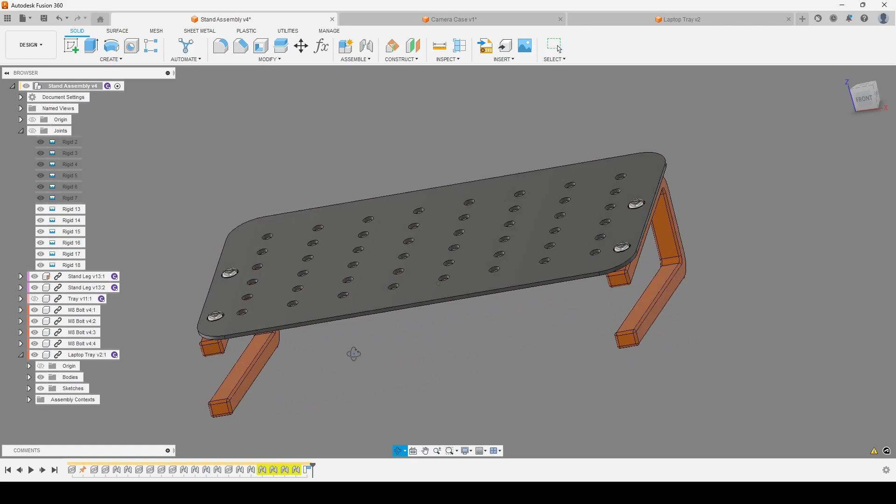So that's just a quick overview of the parametric functionality, parametric capabilities inside of Fusion 360. You can see as we adjusted the one hole, so I didn't point this out, all of the others adjusted at the same time because they are all part of the same feature. So we've got the ability to drive that as well during that process.